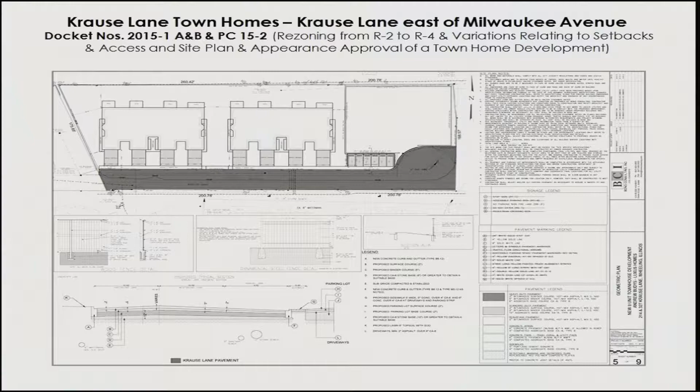One other thing I wanted to bring up was, in the packet, there was a mention of a project with the Forest Preserve District for a canoe landing and a walk-in, almost like the Des Plaines River path was included. Where does the canoe landing come in?

That is not related to this project. I believe you're referring to one of the staff notes under the standards for rezoning with respect to the availability of open space. For context, the purpose of that note was to mention that this area is subject to an agreement between the village and the Forest Preserve District to add a loop trail. There's an existing bridge, and a footpath runs along the west side of the river, while the Des Plaines River Trail runs on the east side. The purpose was just to note there is a plan for open space improvements.

The canoe launch would be part of this Forest Preserve project, with a driveway into it off of Milwaukee Avenue, and this is fairly close to that.

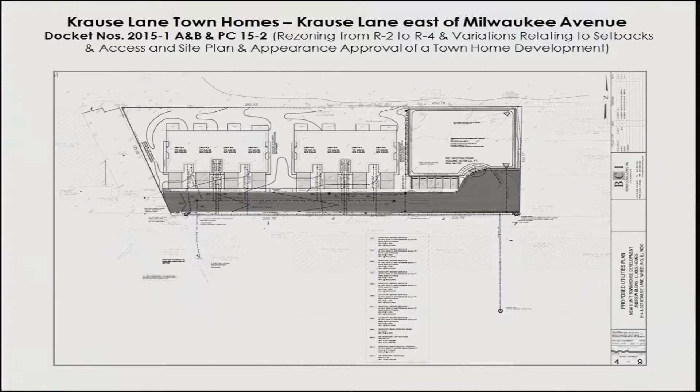Ready for me to go on? Yep. Number 6, that the downspouts for the proposed homes be directly tied to the storm sewer. That I don't know—do you know how that has been designed thus far? We didn't finalize that yet. I'm assuming that would be the proper approach.

Can we connect downspouts to storm sewers?

I would recommend not connecting the downspouts. If there are sumps, we certainly could do that, but I didn't think we could do that anywhere in the village. That's why I'm reading this. If we had a specific concern that there was a drainage issue and the lots were tight, going through this process we could certainly dictate something like that, I think. But I would be against it.

There's a lot of people in Dunhurst that would sure like to connect their sump pumps to that. A lot of people are doing it already. So, okay, we'll follow the guidelines, yes.

Number 7, that parking shall be prohibited on Krause Lane within the development. I don't believe you have any issue there. There were two issues: one side, parking was prohibited due to the fire hydrant location; the other side, there was not adequate space to fit vehicles in between. I think that's been resolved by locating all of the guest parking in a single spot at the end, and the rest of the street would be parking restricted, correct?

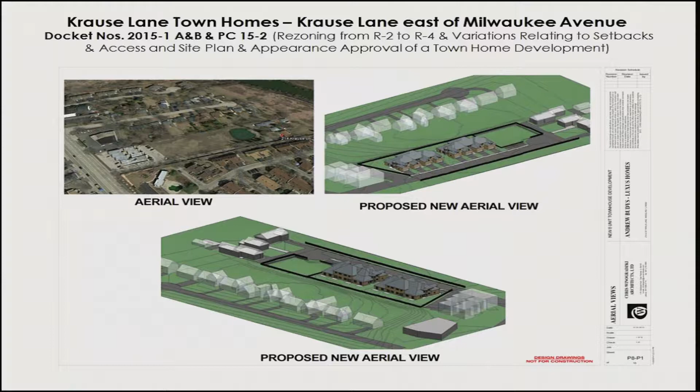Can you show us on that picture where you would be using that hardy board? Can you bring it up, Andrew? I just wanted to make sure. This area - is that hardy board or is that cedar? I think it said hardy board, and then on the sides it showed on the 2 sides.

I would suggest to the owner to use the hardy board as a better material, since we have a wrong sample. So instead of cedar we will use the hardy board siding. What will the color of it be then? I think it would be gray, and as for thickness, you need to get more detail about what the hardy board is.

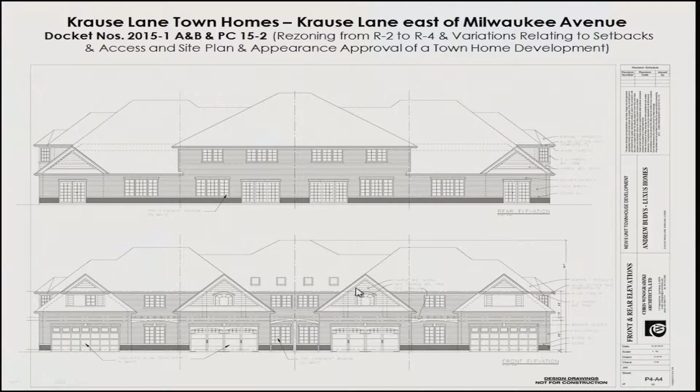We struggle with that, it's not one of our materials on the list, but it is an accepted material depending upon where it is. So we'd probably like to see detail as to where that's going to be. Andrew, if you could point out where it would be, because I had a hard time. It's limited to the gable end. Well, the gable ends could be cedar or hardy board. The life expectancy of hardy board is much longer than cedar.

One other question I had was the patios in the back. Is there any kind of - I've seen it, I'm not going to say I'm a fan or not a fan - like a little fencing, a privacy fence in between each patio, so you don't walk out and your neighbor's right next to you? That's a good question, we didn't address at this point putting in separate fencing, but we could put this, and it could be a cedar fence.

Just a recommendation, because if you sit outside and they're that far apart, it's a little private.

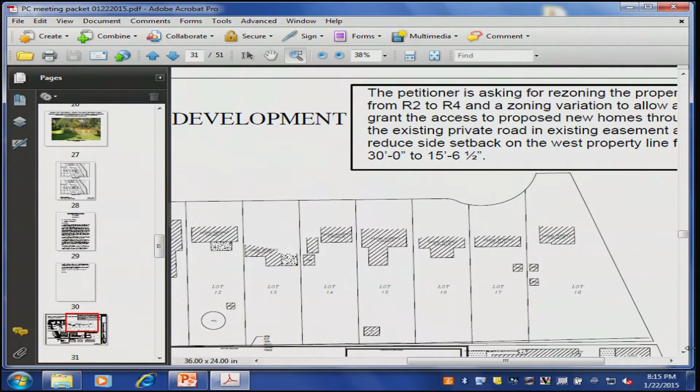These two diverging lines here, I think, is what Commissioner Stein was referring to. Well, one of them is, to the best of our knowledge, a fence line. Oh, I see what you're saying—they're both marked as property lines.

You know, sir, you raise a good point. I don't have an answer for you. Right now we have a plat of survey of our property, and it's showing there's an apparent gap in there, but I'm sure that's not correct. Yeah, so that would need to get resolved. I want to make sure wherever your fence is, it's close enough that it could connect up, so we don't end up with a gap where things collect and nobody's responsible for it.

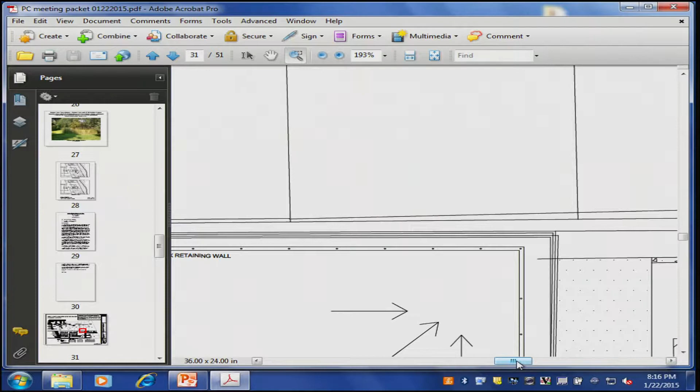So if we could somehow—well, if I could just piggyback on that—ask the neighbors to the north if, instead of having two fences, they'd consider taking down their fence.

That'd be fine too, but I think the property lines shouldn't be a foot apart. I don't even know what the distance here is. Right, that needs to be defined a little bit better.

I agree, that's a good catch, I didn't notice that. I'm thinking it might just be a rotational error in the AutoCAD, that the lines from north maybe are just off by about 2 degrees. That's why they seem to be divergent as you get further. I highly doubt there's like a little unclaimed wedge of property there.

So yeah, that's something we would definitely have to get cleared up, and I did not notice that until just now.

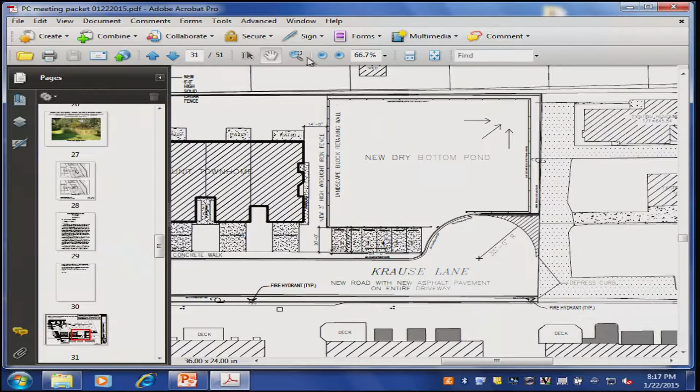And then down, as soon as my iPad corrects - Andrew, if you would scroll down to the south property line, just south of parking spot number 1. If you zoom in down there, appears to be something on that bottom line that comes up and crosses another line, and I don't know if that's your fence or a neighbor's fence.

I think that's where - I don't know what that is. Talking about that little kink? Yeah. And I don't know, I think it may have been how our surveyor connected the dots from the fence symbol, and it may need to get cleaned up a little bit also. I assume that's a fence line. For the property to the south or your property? No, I don't know who owns it, it's just, there's a fence there.

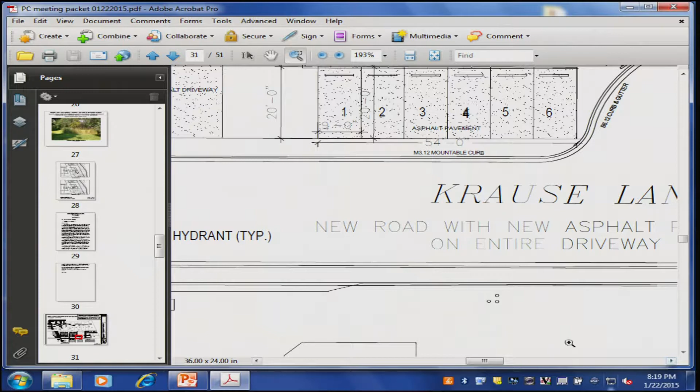It might have been something that just jogged around that tree. They went around the tree? That's probably what it was, yeah. But then it appears that you guys might be doing something on their property, but I don't know there, so. No, the bold line was what we were defining as our property line, just north of it, so. And then this is the curb line. Right.

Obviously, the intention is not to do any work on any of the neighbors' properties, so it would definitely have to get cleaned up a little bit.

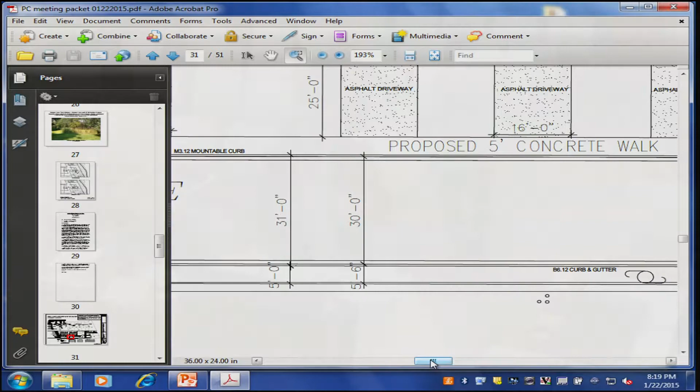We're trying to satisfy what you guys want without spending 100% of the detailed design and architectural budget for a preliminary hearing. So we're just trying to give you some preliminary drawings, and actually we're quite a bit more advanced than we would typically submit for a preliminary drawing. Usually we would give you much more rudimentary drawings, but to get the stormwater issues worked out, we had to do a lot more of the detailed engineering.

But there's definitely a lot more that has to be done. We're only, what we would say, about a 50% design submittal right now. So we have to clean up things and get them working.

Can you tell me roughly how deep the pond is going to be? About 4 feet, in every place except by the cul-de-sac, it'll probably slope in a little bit easier. It'll vary - in some parts it'll only be 3.5 feet. We need to get some slope on there, and in the deep spots, at the deeper end, it'll be about 4 feet deep.

And we're trying to keep the walls under 3 feet high. I think their maximum height of the wall was 30 inches. Above grade level? Well, from the bottom of the pond. Okay, then the wall would only be 30 inches high, about the height of this credenza here. And then from the bottom of that, it would slope down another foot, like at a 4-to-1 slope to get to the bottom.

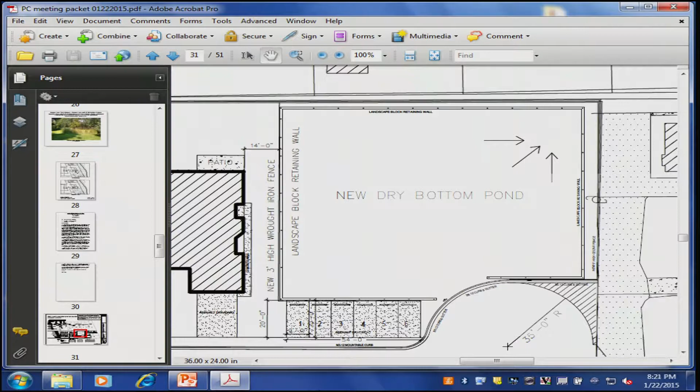But the top of the wall will basically be at grade level - will the fence be at grass level on the one side? I believe there's a detail on one of these sheets. Yes, tell me where it is. I mean, it's not like a barrier concrete wall. The idea is that you'd have a fence and you'd go and see through it.

And I think that was one of staff's comments, was to get rid of the wood fence on the east property line so that the owners of the home would actually have kind of a view of the pond for whatever that's worth. And the neighbors are okay with a fence versus a board on board or whatever fence?

You'd rather have a board on board fence? If you're going to speak, we should probably hold that until we finish with the commissioners. So if we can hold off. Okay, eventually I would like to hear what the residents would like on this.

We'll do that after we're done. Just a comment, you were planning on using GAF Timberline shingles. I was just notified of a class action lawsuit that some of their Timberline products were evidently defective or something in the past.

Just make sure that whatever you do, that they have corrected that problem, please. Sure. I had a concern about sump pumps pumping into the village stormwater system. They're not. I heard that they were. I'm sorry, say that again, Commissioner Steinle. I heard during the testimony that the 8 individual house sump pumps were going to be discharged into the village stormwater system.

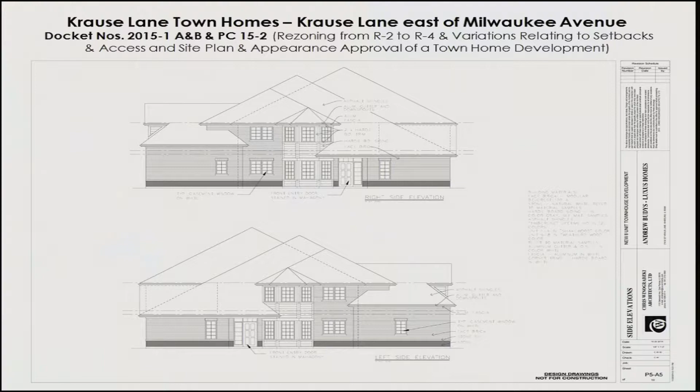Mr. Chairman, sorry to interrupt, but I just wanted to get that one in there before I forgot.

Good point. For the conditions that Pam read, I believe condition 7 should still exist, the no parking on Krause Lane. There are only 3 fire hydrants throughout the entire length of the property, which means people could legally find a lot of places to park, and I don't think the street will be wide enough to handle that. We will put signage for no parking. Yeah, I think that would be best.

If I may, Commissioner Stylen? Yes, sir. That whole side of the street is posted as a fire lane. Excellent, that's even better. Although, according to your recommendations, parking in a fire lane is legal as long as the person is close by. That is directly a statement from you and your chief, so I think we need to make it no parking, period.

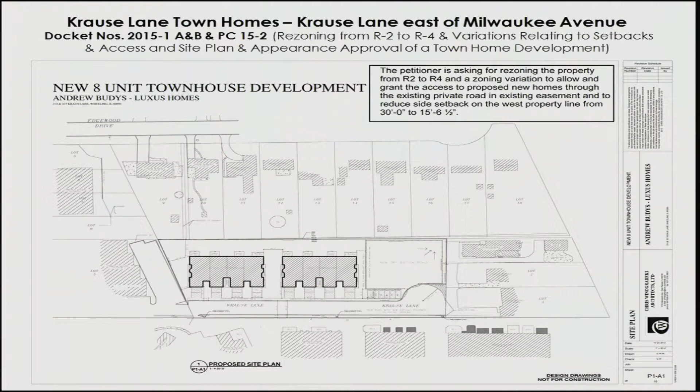Me too. And the water and sewer, is that crossing the road, going right under the road? What happens if it breaks? You want to know where the sewers are? We can ask that. If one of those were to break, does that close the whole road down so nobody has access in or out? They were located so that there would be, if there was a break - I think that was one of the conditions from the last review.

That it was in a spot where you could still get by. So I think this plan had them move it so that there would be access to do repairs, but still drive past it. Mr. Tack, is that correct from this last round? Yeah, that is my understanding, Andrew. Great, okay, thank you. Anyone else?

Yeah, Mr. Friedman? So just to respond to some of the issues that have come up with this easement issue - anybody can look at me and say he's saying there isn't an issue, he's saying there isn't access, but that doesn't make it so. And the architect says there is access, but just because he says there's access doesn't make it so. Ultimately, it's a legal issue - ultimately a court needs to decide whether there's adequate ingress and egress access.

I've read the document, it predates my involvement in this. It's murky at best. But just to give you some sense, ultimately somebody's going to need to decide, and clearly we have conflicting views of it.

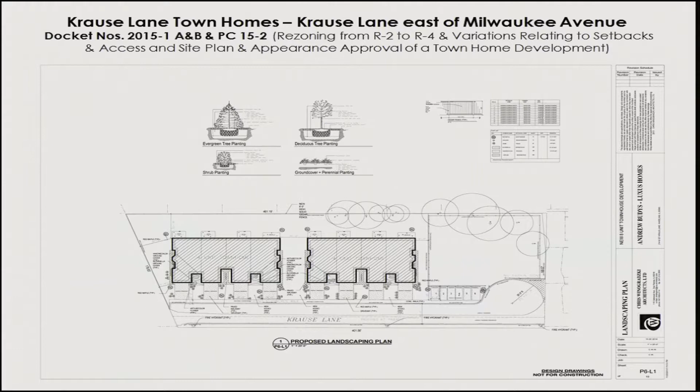And we talked about the lighting and the photometric plan. Are you planning on putting any lights on the garage or any entranceways? Is there going to be any decorative lighting? Oh yeah, that's the standard lighting we have in front of the building and in front of the garage. I'm not sure if I saw that on any of the elevations. Well, we are not at this stage of detailing, but I think that's... I think at some point we kind of need to see that.

And address numbers on the building, is that going to be standard somewhere in the front on the elevation? Correct. All right, I have nothing else. Thank you.

So continuing on, is there anything else that the petitioner needs to prepare for our next meeting, which is going to be February 12th? That would be the next available meeting for this, correct. So I've got this note then: tabled for landscape plan corrections, photometric plan, summary of road easement language, which is a multi-part question relating to maintenance, et cetera, and stone at the base of the side elevations.

Mr. Stylen, you had a... Well, I just have a concern. I've heard a number of times this evening that the petitioner has stated he really hasn't done a detailed design, and this is just preliminary designs of the appearance of the buildings. It's my understanding, once we approve PC 15-2, the petitioner will never come back before us for building design, appearance, et cetera. Am I missing something? No, that's correct.

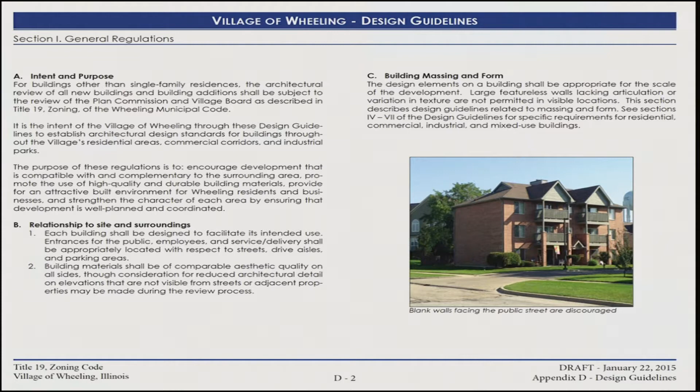We have added graphics to illustrate both what is meant by base, body, and cap, as well as an illustration showing how the articulation of the facade is achieved by putting pieces of the building on a different plane. We have some examples of finished buildings that include some of the design features described in this section of the text. Stop me at any point if you have any questions.

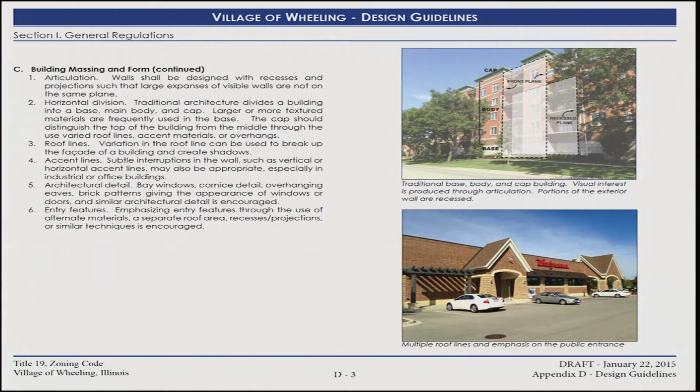Again, not much has changed here. We have just added the illustrations and captions that go along with the text. This particular page, I think, was already done the last time we showed you this.

We found a photograph of a roof screen. Nice roof. Thought you guys would like that. Are those garage doors included in the sizing? Those are actually the sliding doors, so you can access the mechanicals in this case. That's neat.

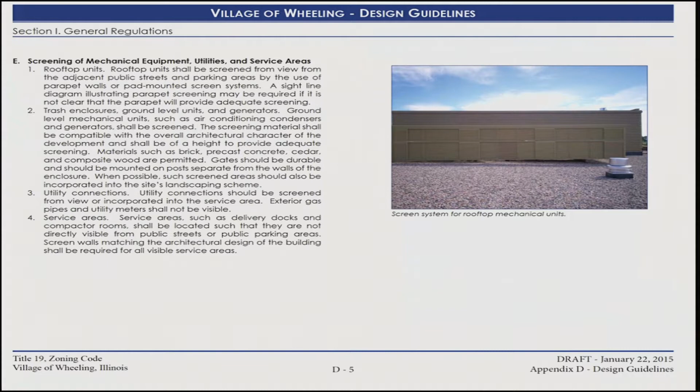This one might be the Westin. They have that kind of system up there. Actually, you know what, they don't have rocks, I don't think. So it's probably not the Westin.

The material section - again, most of this is unchanged. Note number 3 here was one of the things we added after the last discussion: features such as windows, doors, trim, gutters, and downspouts should be included in the plans and should be consistent with the colors and materials on the structure. This was a note that appears in a different form later on under colors, which the commission had requested we add to another location as well.

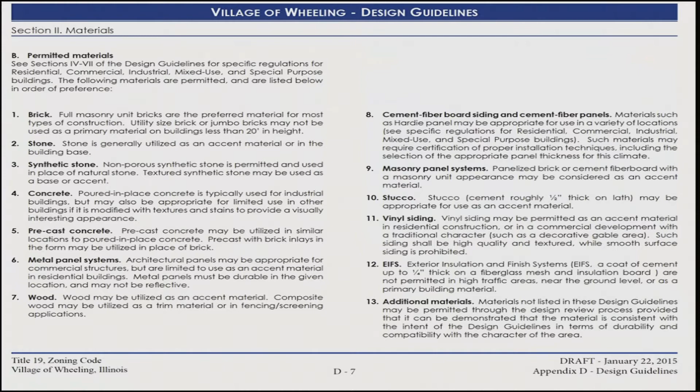This last item, number 6, was one of the items we added during the last hearing, so that's not new. For the permitted materials, we've added the requested note in order of preference. We tried to arrange this so that you could find the materials rapidly, laying out the text so you can read it clearly - no change to the text, just a change to the layout.

This is a drawing, going on to the next page, page 8, methods of measuring building materials. We were trying to find a way to illustrate what is considered a primary material and what's considered an accent material, so we just did a simple drawing here.

Under these requirements, it's also possible for an individual unit to have materials that wouldn't meet the standards by itself, but if it's part of the whole building, it's considered acceptable if it meets the total standard. So we added the unit lines to help illustrate that, and that's what the caption says as well. There's also a note that windows count with the material they are located in - so a standard window or door goes with the material it's inside of.

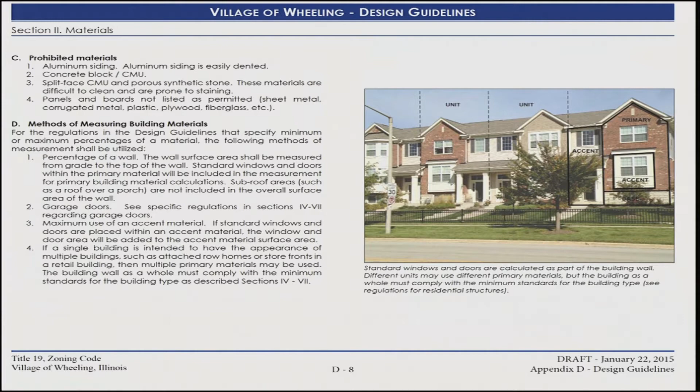We've added some examples of buildings with features we'd like to encourage, as well as a few examples, unfortunately, of things we'd like to discourage. We've been fairly successful at not using anything actually located in Wheeling - we may have one here or there, but most of these are from the Chicago area.

Just a comment about this particular drawing - you say something like this should not be allowed? Well, the idea with the text here was that there were multiple colors of brick being used. If you look, there are other design features on this building - stone lines that run across it that would be apparent if the light colored brick weren't there. So yes, that was the idea.

My only comment is, if this particular building were all dark red brick, it would, to me, look ugly without the other adjustments that could be made. That's my only comment - I don't know if that picture really depicts what, at least, is my particular view.

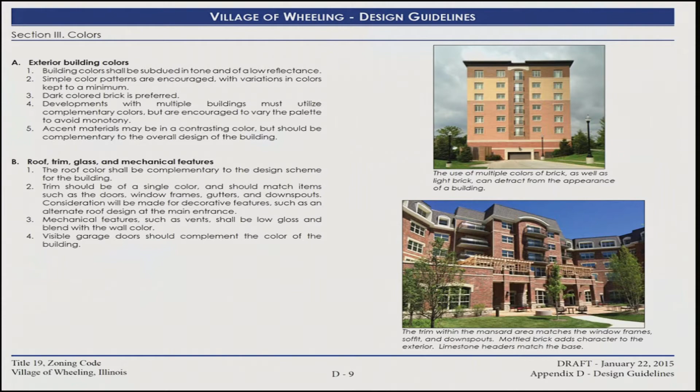Yeah, I think it would look nicer if you put in some of the other treatments, if you will. But we can add to it going forward. I really like this one.

The townhomes and row homes, we wanted to make sure that we did an adequate job of illustrating some of the desirable features on both the front and the rear.

The top drawing illustrates how we would calculate, in the case of a townhome, the use of materials. This particular home has a fairly small accent area. By the rules of this section, the base, provided that it is stone, gets counted with the primary material. So this would be a 93% brick stone home with a small accent area. The purpose of the illustration was to show how we calculate it out.

The lower pictures show the same type of development, same density of townhomes. One has an example where the garages are arranged so you can get doors, a landscape area, air conditioners, and the garbage corrals in back. The one on the right, although we didn't show the front, you can see the side. These are brick, textured brick row homes with, I believe, vinyl siding on the rear, with no space in the rear to break up the pavement.

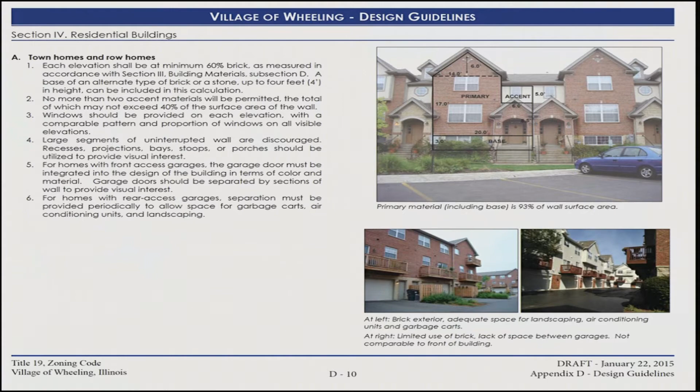Here's an example for the multifamily, showing a building with articulation of the facade, traditional base, body and cap design. It has emphasis on the entry features as well as emphasis on the corner by switching to stone around the corner.

We took the trash enclosure section that was originally written for commercial, and copied and pasted it into the industrial and multifamily sections, just so that it would be clear.

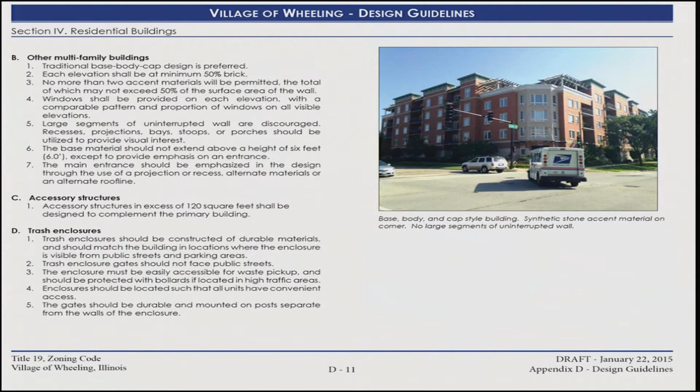A couple of examples of commercial development, commercial character. I'm on to page 12 if you're flipping through it.

Andrew? Yes. In this particular section, do you think we should say something about allocating space for signage, or do you think that would be covered under the normal guidelines? Where are you looking? On page 12? Yeah, 12A.

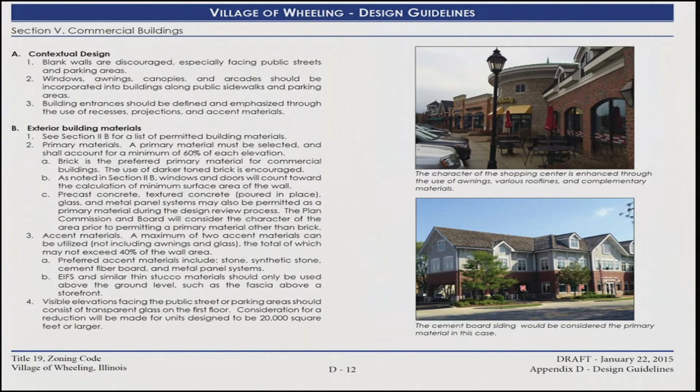Okay, I'm just typing that in real quick. I figured we were safe on one of ours. Okay.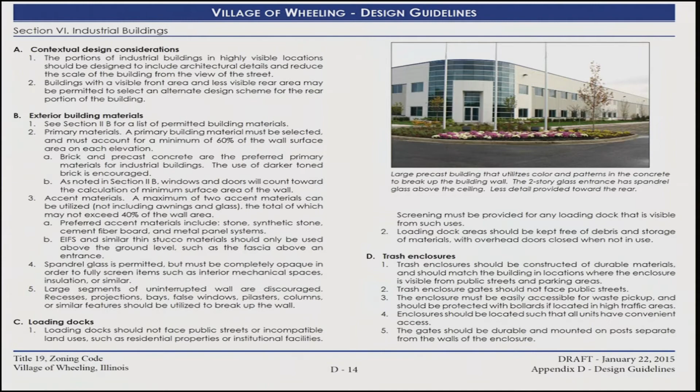And this is it, this is the last page—just giving some guidance as to how mixed-use buildings would be handled. The airport, as we discussed at the last meeting, the main difference between airport buildings and other buildings is the allowance for steel construction, provided there's a 7-foot base. And then for special purpose buildings, we found an example of a public restroom, just to represent all the special purpose buildings out there.

So I have one condition so far, to add a reference to consideration for sign display area in the design of commercial buildings. Yeah, I think that'd be fine.

As I mentioned before, the motion is the same motion we had previously. We would update it to reference January 22nd, but the sections of the code we had previously compiled would be stricken, referencing Appendix D, which is unchanged. That document was dated January 8th, and we do have that still as part of this motion.

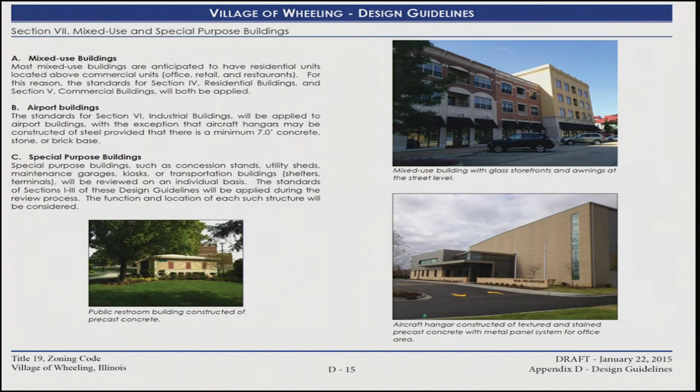I actually have one quick question. Back to page 6, on new construction versus renovations and additions. Where we have additions and renovations on existing buildings that may be allowed to continue, would it be wise to put a percentage on that? Because sometimes an addition can be a lot bigger than the original building. I'm wondering if we're telling someone with a building that they're going to increase it by 70%, could they still use the same materials?

Just an FYI. Could you say that again? Where it says additions and renovations—I'm trying to think of additions and renovations. Which number? Number 6, number 6.

New buildings must comply with the regulations of the design guidelines. But I'm saying if additions exceed, say, 50% of the original building, should they go to the design guidelines, or can they still use the same material that's there? Would they even be able to get the same material, possibly, depending on the age of the building? I don't know, then they'd have to do something, right?

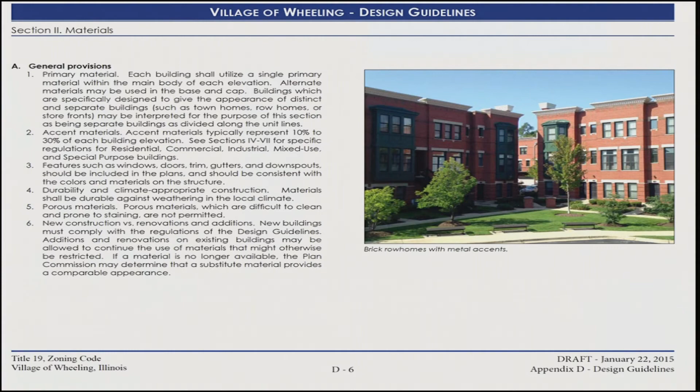Possibly. Yeah, I think right now in the main body of the zoning code we do have a threshold for what's considered major and minor review for an addition. I think we used, for industrial buildings it may have been different, but we used a percentage of the building, or for commercial, maybe 1,000 square feet.

Industrial may have had something different, but we could come up with something that says for additions in excess of... or maybe you just throw in for minor building, and that would leave sufficient wiggle room to reference other areas of the code. Or what if for number 6 you started out new construction and additions versus renovations, and where it says additions and renovations, always make additions part of a design guideline, having to go through a design guideline.

Well, I think all of these go through the appearance review. The question is, when they go through it, what's the standard? Do you have some flexibility to allow, say for example, an addition to a building that originally had vinyl or aluminum siding, you're reducing that. Do you have some ability to let them use that, or is it just case by case discretion? Where do you want to make that distinction? I mean, they're all going to be reviewed—minor and major additions both get reviewed. It's just a matter of when they're being reviewed, how strict to be.